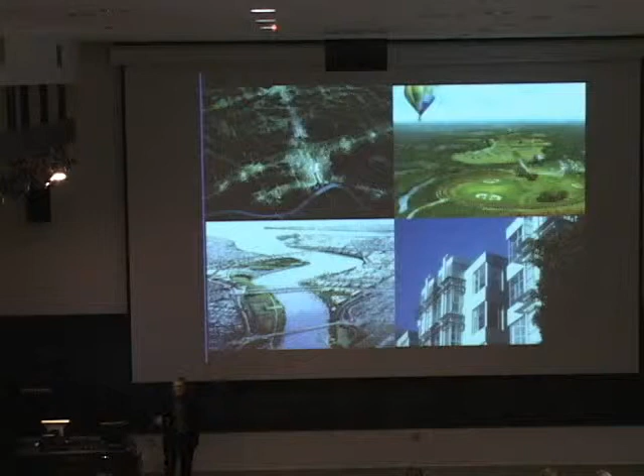Now, within this sphere, my work tends to focus on the urban environment and the ability for landscapes to leverage places -- this one in Nashville, Courthouse Square -- parks, this one Rick Espy here from MSI is very familiar with since we worked together for years on it in California, or streets -- anything that brings people together and creates dynamics by which cities specifically can become sustainable. That's been my focus for most of this incredible time in the office.

This is not my work. This is the cover of the Central Artery in Boston, the Rose Kennedy Greenway. We lost this project -- we came in second to AECOM, or EDAW at the time. We were teamed up with West 8. I only show you this because in my profession, and hopefully in yours, you lose probably more than you win. If you're batting anywhere between 300 and 400, you're doing really well.

So I will try, and we missed a lot of whiffs. I will focus on the few hits that we had that I think have been success stories.

The first one is in Georgetown in Washington. I'm going to share and focus on three projects today, describe them briefly, and then frame them in the context of these new ideas that I was mentioning.

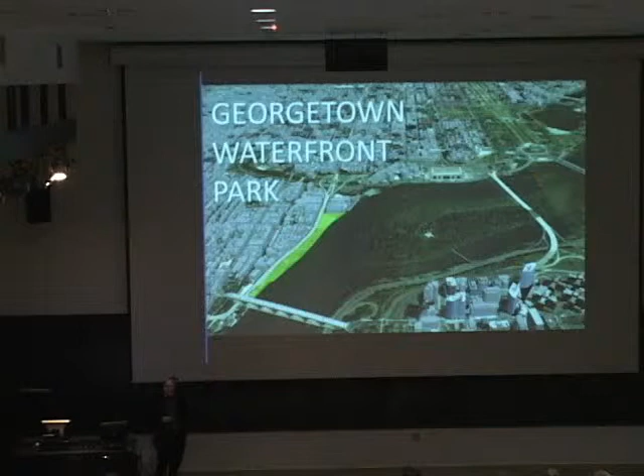This project is a narrow band that faces the Potomac River at the foot of Georgetown, which is a hill town. You can see the relationship to the Kennedy Center for the Arts and the mall and so forth. This is the case where, historically, Georgetown preceded the creation of the nation's capital.

Like Philadelphia, Trenton, and even Tuscaloosa in Alabama, these are towns created at the farthest navigable reach of the rivers that descend down from Appalachia. This is where it's called the Falls, the Little Falls, and this is where this place grew up.

It was a place where schooners and ships came forth to pick up tobacco and various other products to take back to the old world. In time, it became an industrial site with power plants, tanneries, cement plants, and things of that sort.

Eventually, they decided to put a highway between the waterfront and the town. That's what we inherited as a site, basically a parking lot.

This is a national park, same category run by the same folks that run Yellowstone. But this is the only waterfront urban park in the nation.

So it was quite a challenge to work on this, particularly working with a very diverse community within Georgetown, also the capital, the National Capital Planning Commission, and National Park Service. It was quite involved mechanics of designing this thing. I'll briefly share some of the key issues we had to confront.

This project was dedicated in two phases, the last one back in September of last year. It took from 2002 to 2011 to become a reality, and basically that's strictly a question of funding.

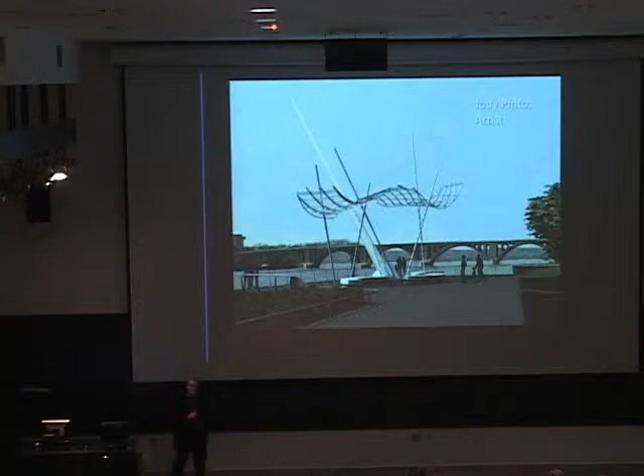It did not pan out. This was one that was rejected by the community, and instead we had to design, without her participation, a different kind of feature in this projection shot into the waterfront.

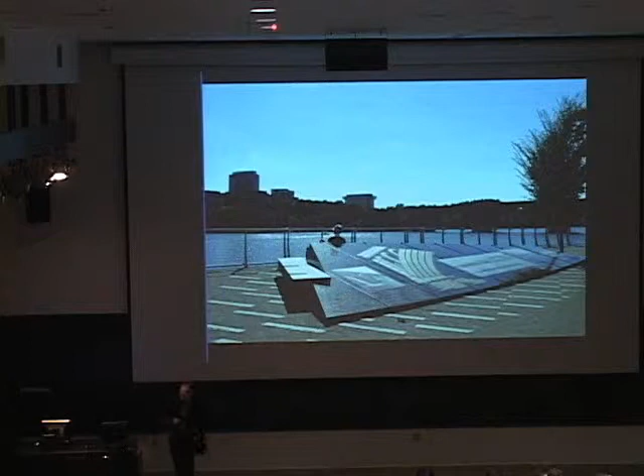These are basically granite panels that incorporate seating, etched with imagery of the place. The little wavy things that you see there are raised granite stone pieces that attempt to keep skateboarders away, which is one of the things that is always a concern in anything you design in a public environment.

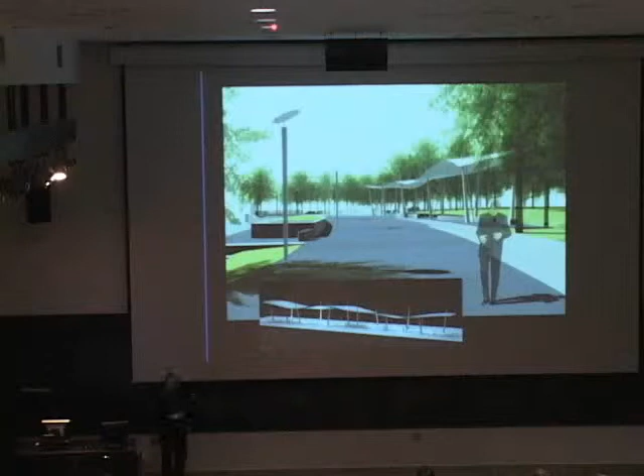So this was a case which is part of the theme I'm going to touch on today: the role of art and how you have to negotiate sometimes the things artists do or don't do in these kinds of things. Jody also designed this kind of wavy pergola that was supposed to be a fiberglass material that's transparent, including fiberglass benches.

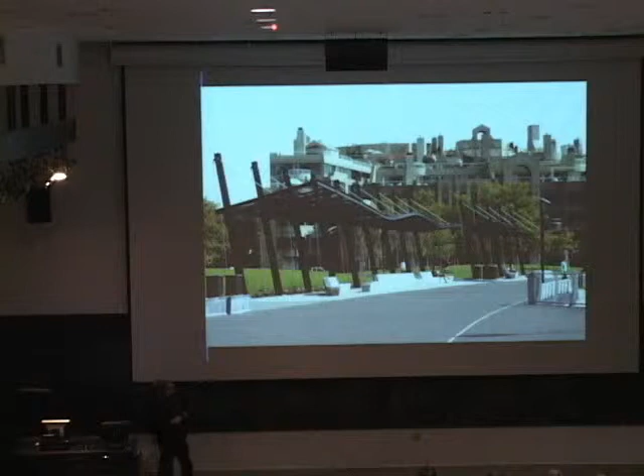And it also did not pan out, but we did keep the idea alive until the very end. So this is supposed to be a pergola. It was just installed, as I mentioned, last year, so the plants haven't yet been able to grow up on it. But it's there as a way to imagine a kind of waterfront that has to do with the expression and capture of a seaside environment, clouds and so forth, being in a different place. That's also structurally, from a material point of view, rather stark, not decorative, picking up the elemental qualities of being on the ocean and on a ship.

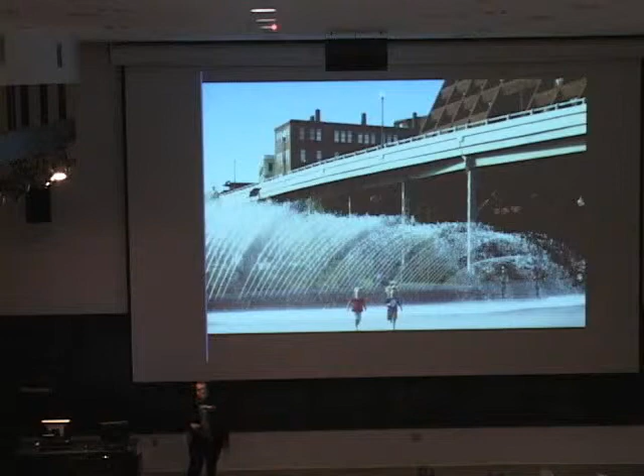And the fountain here was something that was quite interesting to design. It's a very simple fountain, really—there's nothing mechanically difficult about it. The jets don't move in any way, but it's supposed to come out of a big chunk of stone back there to create the form of a wave, as if a wave were coming up. And it's quite enjoyable for the kids.

So that's one project that I think was a real test of how you work with community, how you engage communities to fund something they can support, how you test against the community that wants something different than you as a designer—and clearly as an artist in this case—need to put forward. There's a whole dynamic about that I could bore you to tears with, but nonetheless it's so important in our profession to be able to negotiate those kinds of encounters and what the role of the designer and the role of the community is in those regards.

It's interesting—this image of Georgetown we saw after the design had been cooked, in fact already under construction, and I began to notice the projection of piers on the water, this kind of stone monuments rising up, clearly the ship. When it was all said and done, the design picked up on a lot of these features, unbeknownst to us in any way.

I think it's something about how you enter the process of design by getting so immersed into the soulfulness of a place and its historical qualities, to be able to absorb internally what might come out in terms of design. That's an exercise that's very difficult to do in practice because typically clients don't pay you to do that. You simply have to do it on your own time, go research, go to the historical societies, visit the site, be part of that environment for quite a while before you begin to absorb these qualities that you can pick up in design.

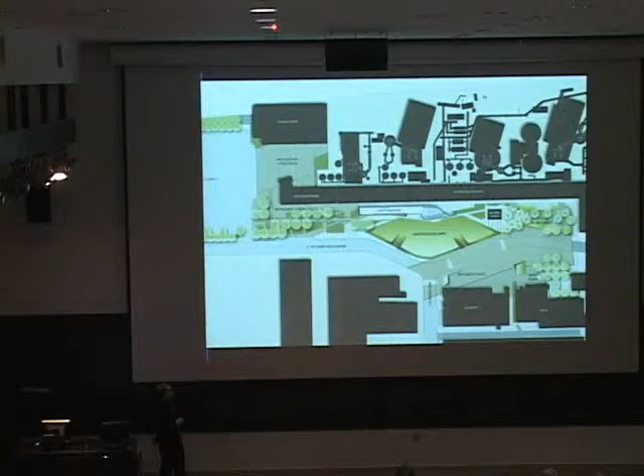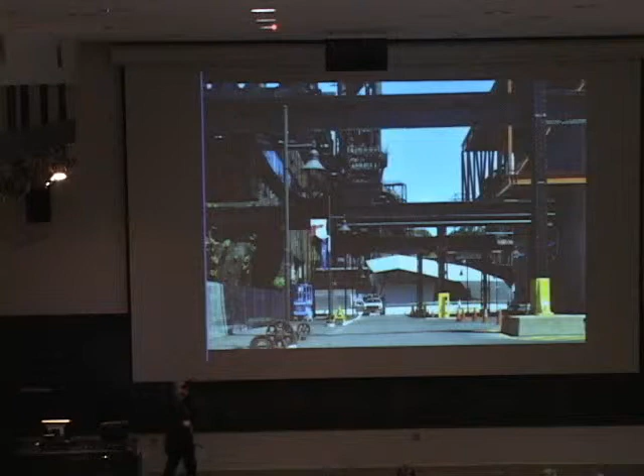Credit to them though, the casino was fairly sensitively designed to fit in with the environment. One of the things that had to be done was to curve the street that went through there so there would be enough room for the amphitheater to exist, and it had to be lined up with this street. Our office designed the building and the landscape. It was one of those landscape architecture collaborations, I think fairly successful.

It has a capacity for about 1,200 or so people. There are 60 free concerts a year. Behind this image to the right is the ArtsQuest building, and they have their own set of concerts. Off to the left, behind the building, they erect huge stages for 5,000 to 10,000 people performances several times a year. So it's quite a venue. Because it's about equidistant from New York City to Philadelphia, more or less, it draws an awful lot of people. It's a huge boon now to Bethlehem.

The stacks are lit up in the background. In fact, the design of the wall you see there, which is a sloping wall, is part of the lighting system. We didn't want any lights, fixtures or poles in the way of the view of the stacks. Working with L'Observatoire International, a lighting company in New York City, we came up with the idea of lights that would reflect off of the concrete surface. It's about a 3.5-foot rise to get the pitch down to the amphitheater. And there you see the lit pavilion.

Some of the ideas there: those wicket-like staples are in fact also light fixtures. They're basically simple fluorescent tubes that you can buy anywhere, Lowe's, Home Depot, attached to a frame that creates a special glow in the landscape.

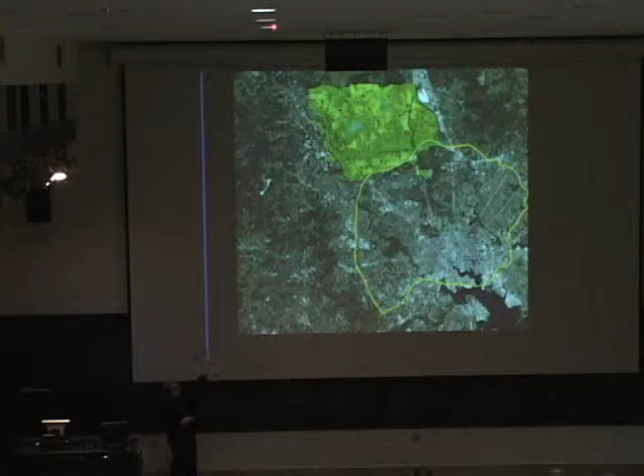It was a valley of agricultural land owned by well-to-do landowners who wanted to keep development at bay but make some money out of it. I won't bore you with the details, but it lies about 10 miles due northwest of Baltimore, even beyond the beltway. You can see the line there, and that's the size of the land compared to downtown Baltimore—it's many times bigger than that.

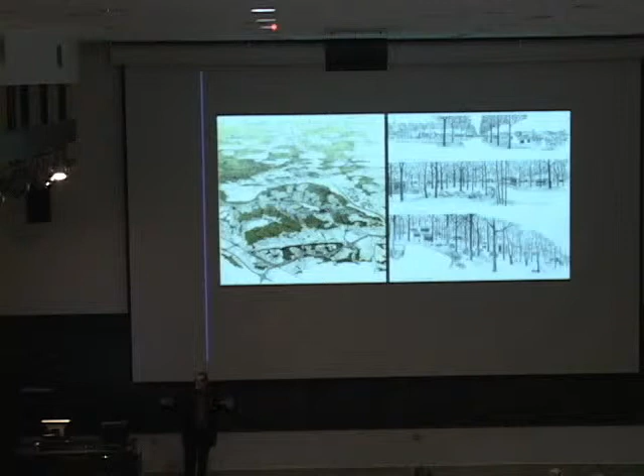These are some of the original drawings of creating clusters of development, trying to fit development in the woodlands, preserve the limestone valleys for agricultural purposes and so forth. Nothing ever happened—that never got built. There were other conditions that dictated why that didn't happen.

But here's another one: in the 1970s, the Woodlands New Community was one of those classic examples that's still written about, because all the drainage was done in natural ways. There were no pipes involved in stormwater, and as you know, it rains a lot in Houston.

Initially, there were modest buildings and houses like the one up top. Eventually, they began to get more and more valuable, and we began to see little McMansions crop up everywhere. Now there's a big town center in here that wasn't there originally.

This is what leads me, and I think many, to wonder: what is the legacy of design with nature? The Woodlands is 30 miles north of, and well outside, the Beltway in Houston.

And we know what this has meant in terms of sprawl. These are maps the U.S. Geological Survey made to map the growth of cities over the 22 years from 1970 to 1992. It has grown this much. It's interesting—I don't know if you can see the numbers in red, I guess they're not visible—but the Boston metro area has grown proportionally much more than Houston, which is shocking. It's more sprawled, even though the population hasn't grown as fast.

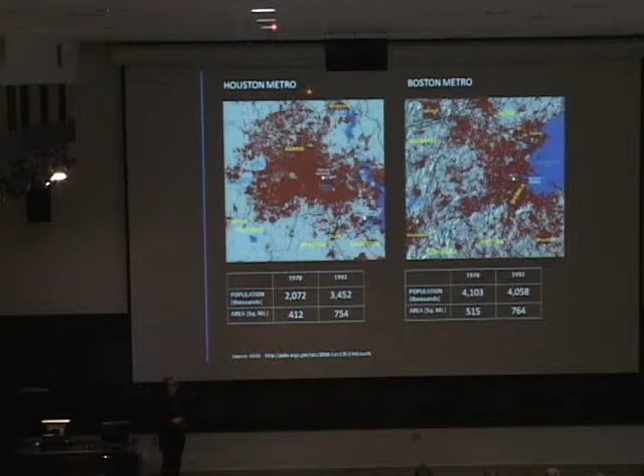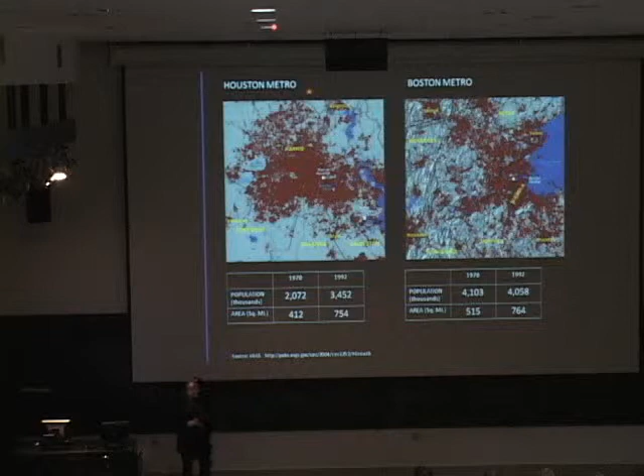But that's really the idea: if you do your planning correctly, following NEPA, you can do this—build your highways financed by the government to put people out there. It's not the purpose of this talk to tell you about the impact this has on climate and so on; it's been well documented elsewhere, I'm sure.

This is just one good book, if you want to learn about the health impacts of suburban development. It's quite a compelling talk that Richard Jackson provides in this regard.

But I think in the end the politics of sprawl are kind of irrelevant. We cannot expect that the next doubling of the population will occupy as much land as it did in the past 50 years. No way, no how.

And if nothing more, the limits of design—the land available for development—is shrinking because of conservation efforts. There's less land available to house the next 200, 300 million people in this country. That might take 70, 80 years, but still, it's fast coming.

And this is just one example: South Livermore Valley, off of the Bay Area. People were getting tired of that kind of development you see up there—the sort of one unit per 20 acres, or the golf course communities.

We did a plan about 15 years ago that began to concentrate the development in specific parcels closer to the town that was there, closer to the transit lines. The end result was something like this, creating a new agricultural environment—those are new olive groves, and there are vineyards embedded in the housing development as the landscape of the development.

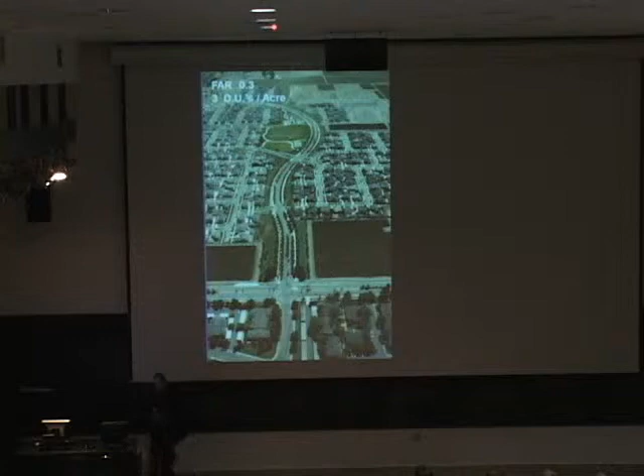Even this is not enough. This is what that development up in the upper area looks like—about 3 units to the acre instead of 1 unit per 20 acres. A big achievement there, but it's not enough.

We're going to have to start looking at models that are in the 30, 40, 50 dwellings per acre range, FARs of 3, perhaps 4. We don't have to go to the scale of New York City, but we have to go to that scale if we have any hope of achieving a sustainable matrix in cities throughout the nation.

So the question is, if you build it, will they come? What does it take to get people excited about these kinds of environments? I hate to tell you, it's not the architecture—it's not how well designed. This one was designed by Dan Solomon, who was a principal in our office for a number of years.

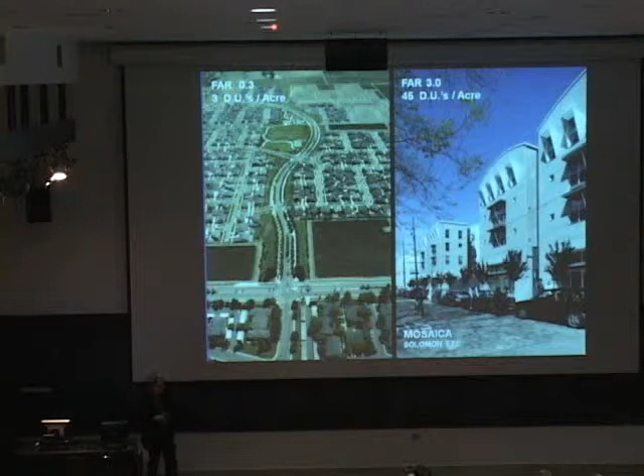It has to do with what I call this idea of beyond design with nature—putting in the green infrastructure, addressing what I call localism, which is working in specific places with specific people about specific issues that affect them, through a public engagement process.

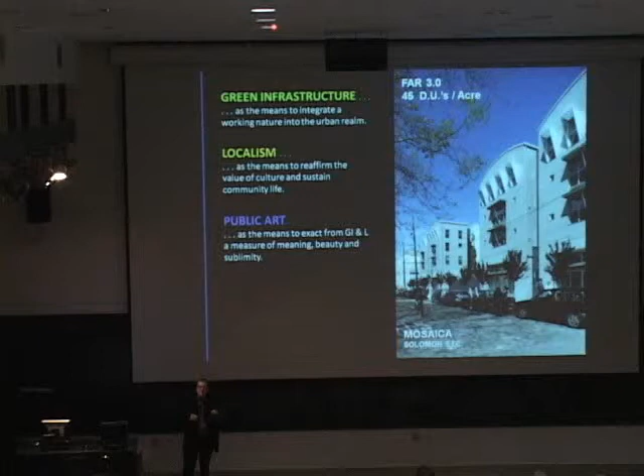And third, and very importantly, public art. I don't think there's been enough done in terms of integrating public art throughout. There are many programs that percent for art and so on, but it's very uneven, very difficult, and sporadic in achieving quality. So one of the things I'm trying to address is how do you integrate these three things within an ecological model? That's the basic question I'm trying to address.

We have changed the landscape. It's an urban landscape, and that is changing us. We are now much more focused on urban environments, and the urban nature, the things that we care about and do in this environment, is very different than it has been historically.

By the way, if you ever wonder where the longest, straightest road in the country is, it's in North Dakota, near Fargo, called Route 46, and it runs for 120 miles, straight and narrow. One day I hope to go visit it.

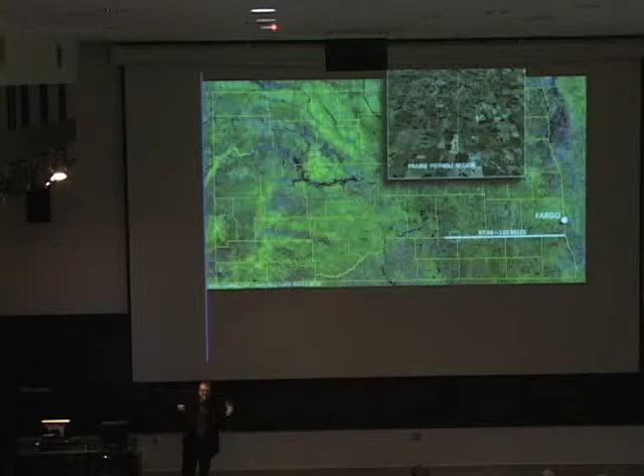Near there is a place called the Prairie Pothole region, an amazing collection—a regional thing that comes off of Canada. It's the biggest concentration of waterfowl, a migratory landscape, a remnant of glaciation that created these potholes that fill up with water, and millions and millions of waterfowl come through here. Well, roads slice right through them. So this idea of nature and infrastructure, I think, has to be looked at very carefully, especially by landscape architects.

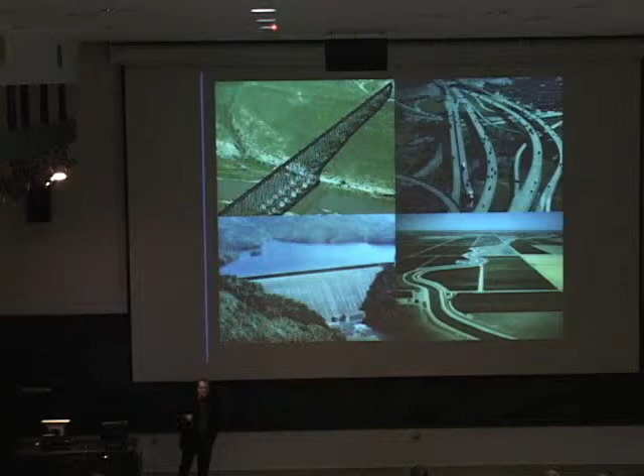This is the landscape that we have created—dams and highways and canals and railroads and all this kind of stuff. So the point of all this is that we have really reversed the formula of thinking that we have lived surrounded by a natural environment. Now we have natural urban environments that surround little remnants of nature, important as they may be.

And I think the one here in Philadelphia—this is called the John Heinz National Wildlife Refuge. It's about 1,000 acres, and you can see where it's at. It's surrounded by Philadelphia International Airport. The yellow lines are interstate highways. The orange line is a major northeastern rail line for Amtrak and freight. The blue lines that fade are the flight paths of airports. And then there's even a dashed line that takes you to the pipeline from a tanker port into a refinery.

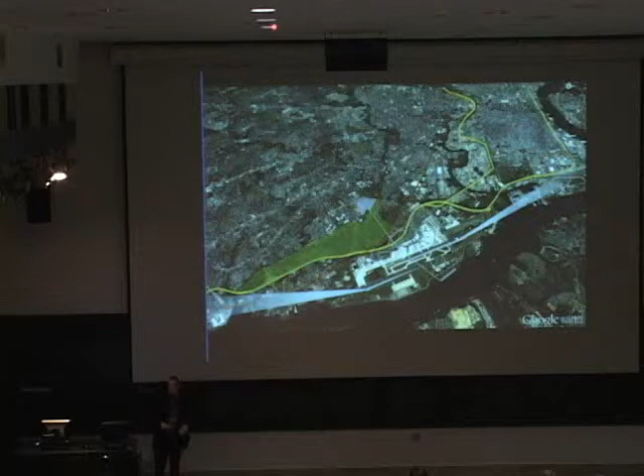And yet this is what's left of what used to be a major delta of one of the big creeks that empties into the Delaware River.

So I use that to get to this project, which is the Trinity River Corridor project—really quite a stunning desire on the part of Dallas to turn a piece of infrastructure into a living landscape. I think that if there's any future for the profession of landscape architecture, it is with infrastructure. And the more we can begin to address that, working with all the engineers who are working with infrastructure, the more we can gain on this question of greenness in cities.

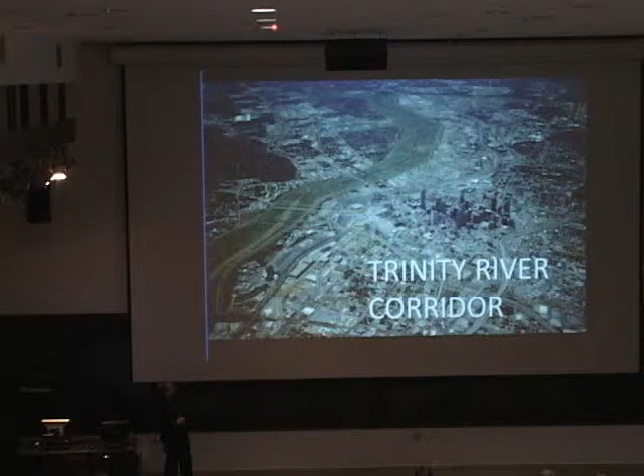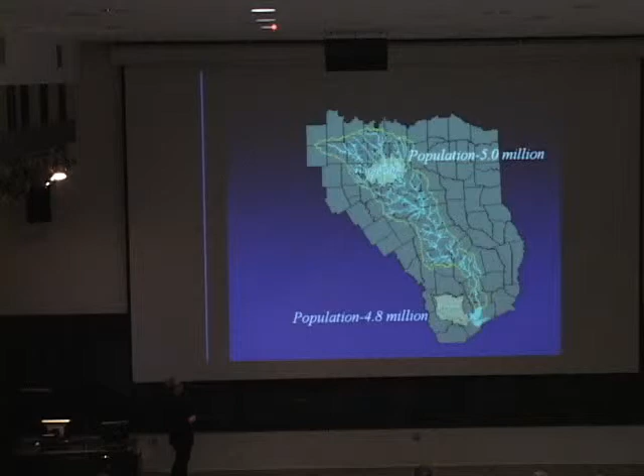It is part of a 10,000 acre parkland that includes some pristine bottomland forests on the bottom side. And this is the reason, in fact, why Dallas exists at all—when it was founded in 1840-something, they found a place where people could ford the river. They could actually walk across when it wasn't filled up with water because of the shallow geology of limestone that was there. So the idea of water and geology are embedded in why a city is where it is.

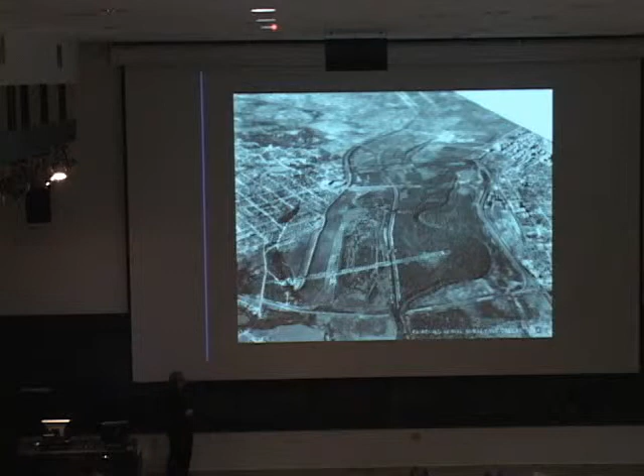There was a major flood in 1918 that wreaked havoc, and that created the idea that the Army Corps of Engineers should come in here and fix the problem, which they did. The first thing they did is they relocated the river—they moved it 3 miles. They also began to build levees. You can see the old river to the right, and the levees beginning to emerge. The future levee would be there where that line is. And of course, to build the levees, you have to build bridges to get from one side to the other—big, long bridges, more than half a mile in length.

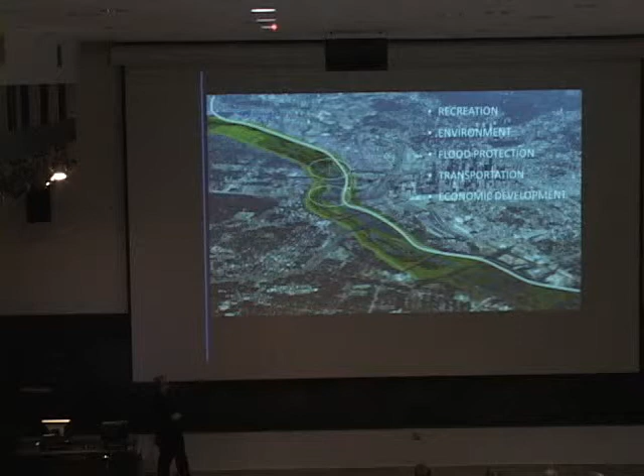And so the floodplain looks like this. We began to model ways in which it could be changed. One of our interests was to turn the highway into a major work of green infrastructure. So that's just one of the things we did.

There were lots of questions about birds. We talked to the Audubon Society, and they said don't worry about it—birds are more worried about cats than they are about these things. But it nonetheless was a source of concern, because if a bird were to hit a blade, it might fall on somebody's windshield traveling at 60 miles an hour. All just diversion tactics not to put this stuff in there. It is in the books, it is in the guidelines, and I think there are lots of people interested in doing this.

It looks like a park, it smells like a park, with lots of recreation, more than 40 miles of trails. But the big idea was the lakes. There's 3 of them. This one really is an Olympic rowing course.

We're using these devices called SolarBees. They're solar-powered devices that churn water so you can keep it circulating without electricity, and they float. There's about 4 of them throughout the lake.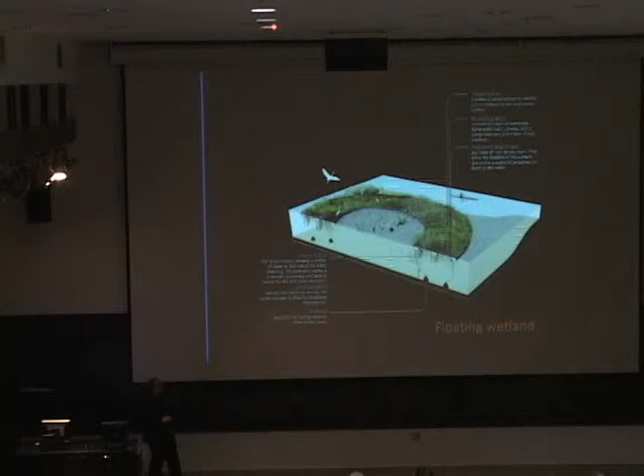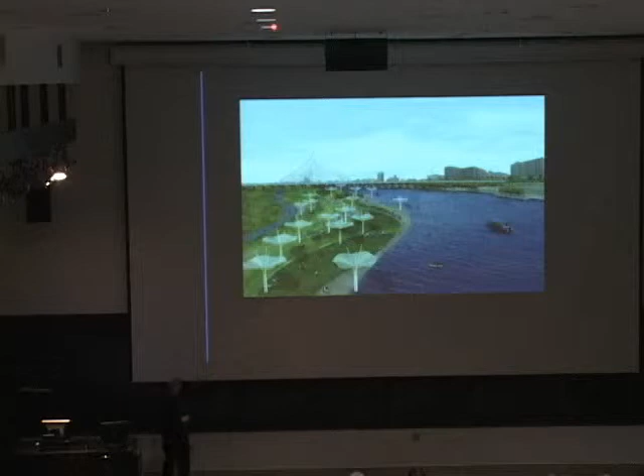Then the urban lake, of course, is what it is, much more about recreation activity, people gathering, fireworks, 4th of July festivities and the like. But the whole thing has to flood. So we placed the umbrellas such that when the floods came, they could almost appear like water lilies, and they were lit up. It's all solar fabric, so they'd have basically no electrical conduit coming to them—just self-powered.

And by the way, that's one of the Calatrava bridges on top, which will be dedicated to the public in a month.

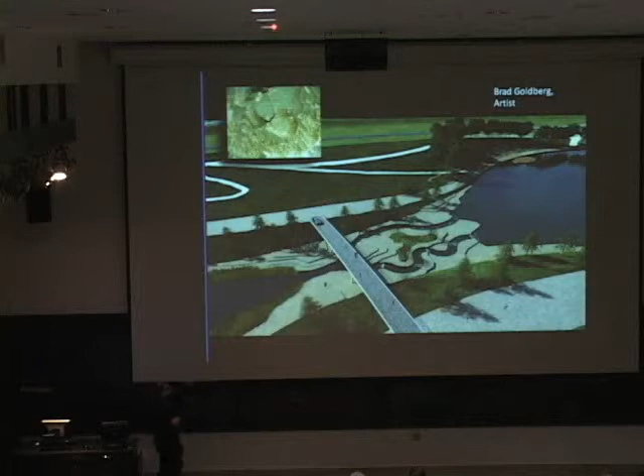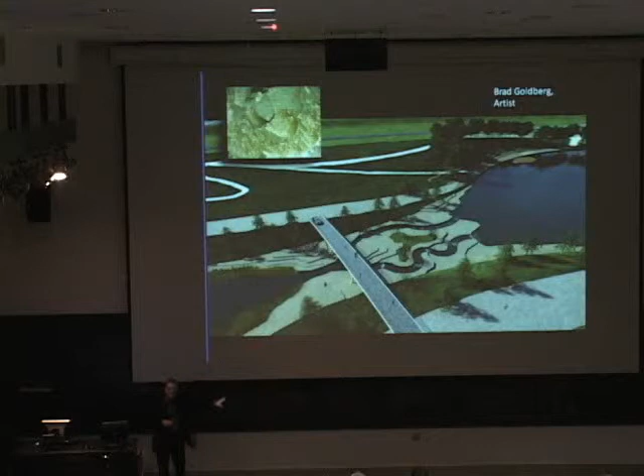The isthmus is a place of interest. We work with artist Brad Goldberg, a specialist in working with limestone, based in Dallas—he works all over the world, but he lives there. The idea was to create a place that could be forded, walked over from side to side using local limestone, but also allowing passages for kayakers and things of that sort. So it becomes the center for the idea that you can habitate this river in new ways, recalling the very nature of the place when the city was founded more than 150 years ago.

What's of interest here is not the recreation stuff I just showed you, but in fact 82% of the site is some kind of natural environment—whether wetland, woodland, meadow, lakes, or riparian.

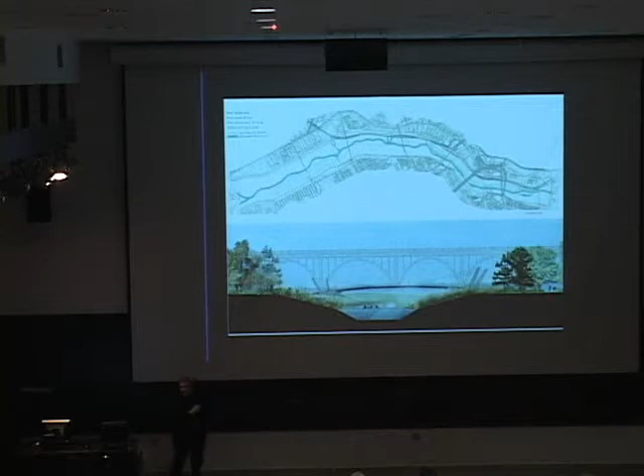The river, for example, is taken out of a straight line and given a new meandering quality. It's being lengthened by about 3/4 of a mile because of the meanders, working with engineers to create an embankment situation that allows for new habitat, so it works as a wildlife corridor connecting that big forest I showed you before with this thing here. This is the only instance I know of any city moving a river twice—but it hasn't been done yet, so you don't know.

This is one of the flood images. When you put water in a floodway, hydrologically the coefficient of resistance for new water moving over it decreases dramatically, so you speed up floodwaters as they move over it. The Army Corps of Engineers won't let you do that because it creates impact downstream. So you have to find a way to resist the water, to create a hardened coefficient, and the only way to do that is through trees.

So in a floodplain with almost no trees, more than 19,000 are being planted here—that's the impact of 19,000 trees. It's not that much if you think about it in terms of carbon sequestration, but it's a big chunk, it helps. I think one of the things you can always consider in landscape architecture is the impact on these kinds of serious issues we have to live with.

There's more than 300 acres of wetlands being created with new vegetation, and that's the impact of that. Wetlands are actually far more efficient at trapping carbon than trees. Of course, they produce methane, which is a problem, but scientists are still trying to figure out the cost-benefit of that.

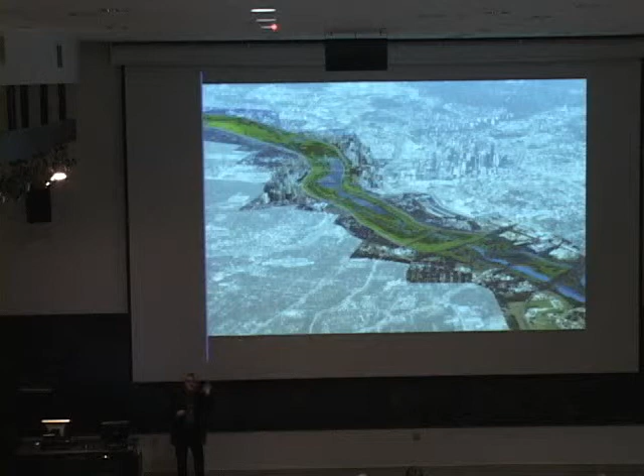So if you really want to have an impact on sustainability, it's not about more efficient cars, it's about concentrating people around an amenity that they would want to live by and enjoy, creating a different kind of city than exists there. It's easier to do in the Southwest and Midwest, where you have land in the city to do it.

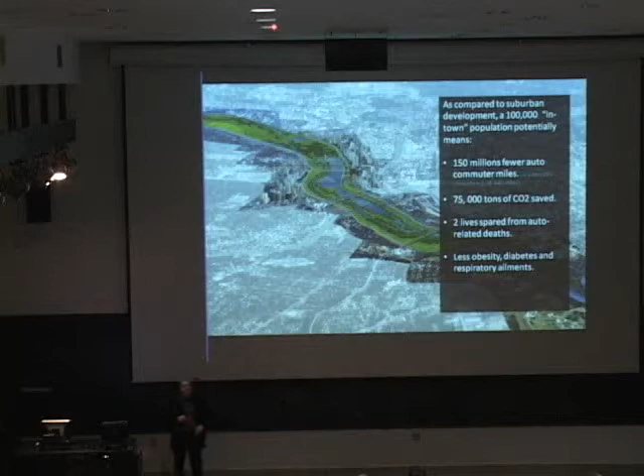Statistically, you would be saving two lives a year. Maybe that doesn't mean much, but if it were yours, it would mean a lot.

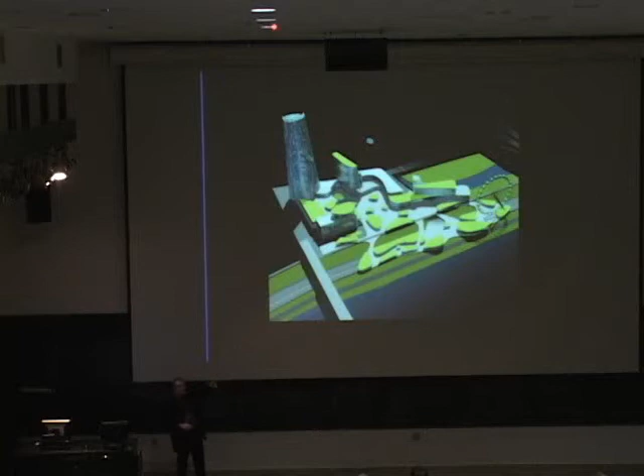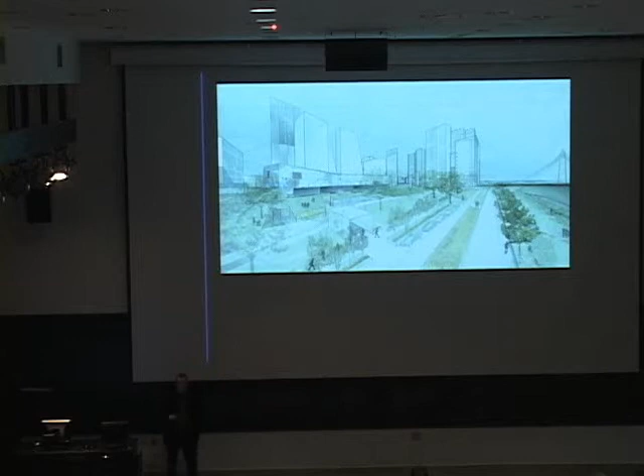And what this did was begin to attract development. This is one developer out of San Diego who came to our office looking for a way to span the levees and the highway to create a waterfront environment in Dallas where there is none today. We happily obliged—that's part of the design of the park. We're interfacing with this development, and other developers across the way are beginning to look at the same kinds of things.

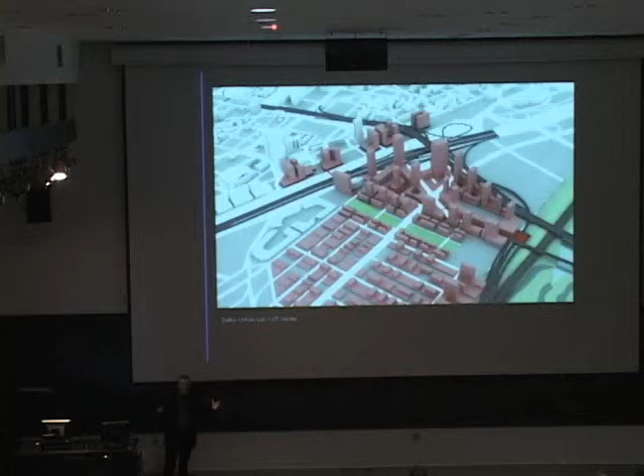UT Texas has a studio in Dallas every year—I don't know, Jason, if you were there when they did this. They did some urban design plans there. You can begin to see the impact of green infrastructure in the city.

What we really tried to do from the beginning was tell the city and everyone that it's not about the park itself, but about projecting this infrastructure out into the urban environment—what we call Parks Without Borders. It's about corridors of connectivity, even to development parcels per se.

That's the new Calatrava Bridge that will be dedicated in a few weeks. The bridge next to it is called the Continental Bridge, and it will be abandoned because it's no longer serviceable or needed as a transportation corridor.

So we've been doing designs to turn it into a pedestrian way, almost like a High Line, but a la Dallas. It's about 50 feet wide and about 2,000 feet long, and it's already going into construction, probably sometime this summer. It's one of the issues of green connectivity.

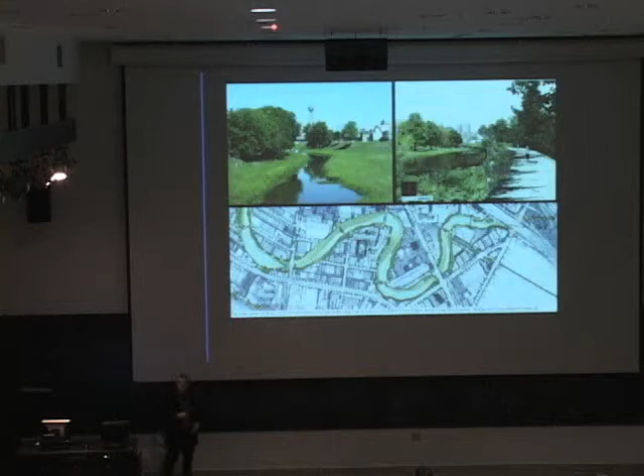The old sumps, the old river—people are taking designs to create trails and bring new housing attached to that. We have done designs for all the major streets surrounding and framing the floodway using complete and green street models. For me, this is where it gets so interesting.

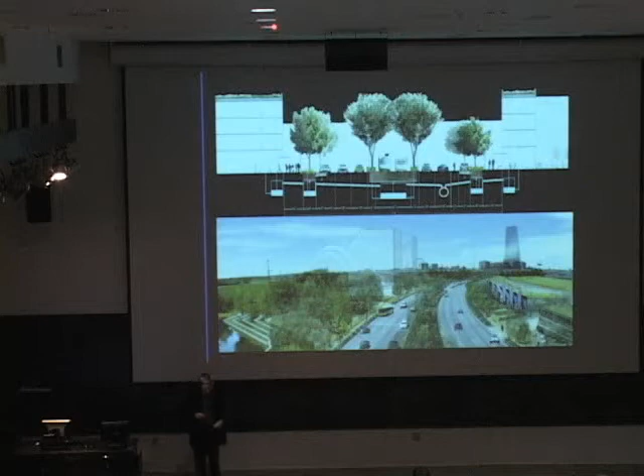It's about going from the regional use of landscape for infrastructure, such as water in this case, to the rooftops of those buildings. What connects the two, I think, is the important thing. You have to use systems thinking that engages architecture, planning, and landscape architecture in all these concerns to make a wholeness out of the thing.

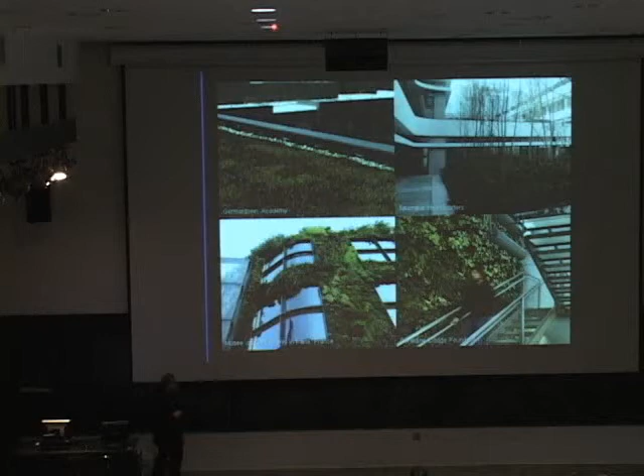This is all work we do, except for the green wall—I'd love to do one, I haven't done one yet. But it's about the green roofs, the terraces, the indoor ventilating green walls. It's taking that to the street level, to the bikeways, to the big parks, in one consistent application that applies systems thinking on energy, water, air quality, noise, cultural heritage, and so on and so forth.

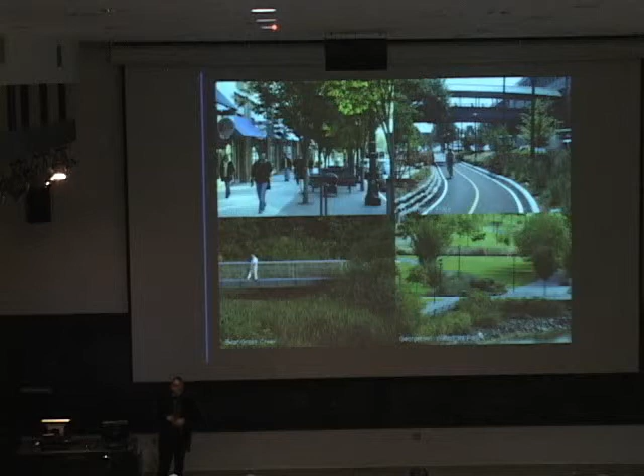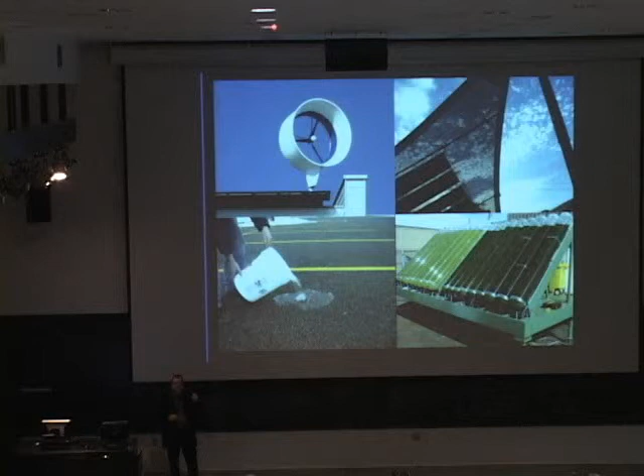And then we get to this—I mean, this is good stuff. There's no reason not to have algae farms on rooftops. Actually, we'd be far better off putting algae farms on rooftops than solar panels, in terms of energy production and impact. All this stuff exists—this isn't being tested out in labs, this is all proven technology. I keep thinking, what would happen if this country spent what it spends on highways doing this kind of stuff instead? Where would we be in 50 years?

Even stuff like biotrophic treatment plants - this was invented by John Todd. It's basically a toilet that brings your wastewater and treats it in a tank on your rooftop. There's no reason not to do that.

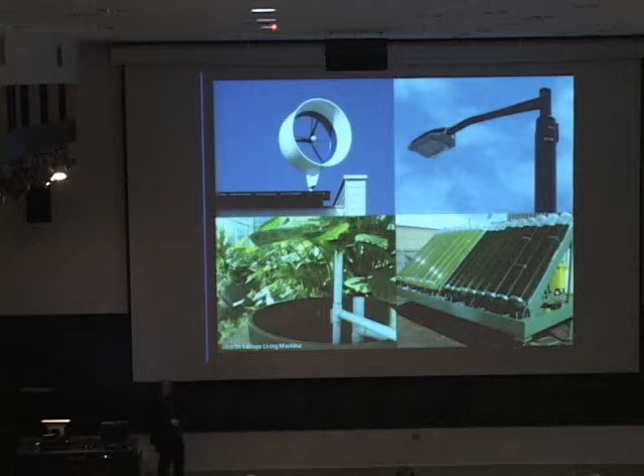But we cannot forget, and this is the main point for me, that ecology is not strictly about green stuff. If you follow the writings of Leibniz, if you follow the critique of Gilles Deleuze in The Fold and the Baroque, you realize that ecology is also about what's in the mind - it's mind and body unity, which is perhaps an anti-enlightenment idea. Let's get rid of the enlightenment for a minute and think about ways we can connect these two things - what's in the heart, what's in the mind, as ideas to bring forward.

I come back to this image of the potholes in North Dakota. This is a landscape that has been severely tested and impacted by agriculture, and yet it exists in the minds of people in Fargo as an ideal place so close to the soul, so close to the heart, that it deserves a place in design.

This project, called Fargo 365, is a winning competition entry that four of our staff in Philadelphia did for an urban block in Fargo. The name comes from the idea that you can occupy a public space and a building 365 days a year in a climate that really isn't easily conducive to that.

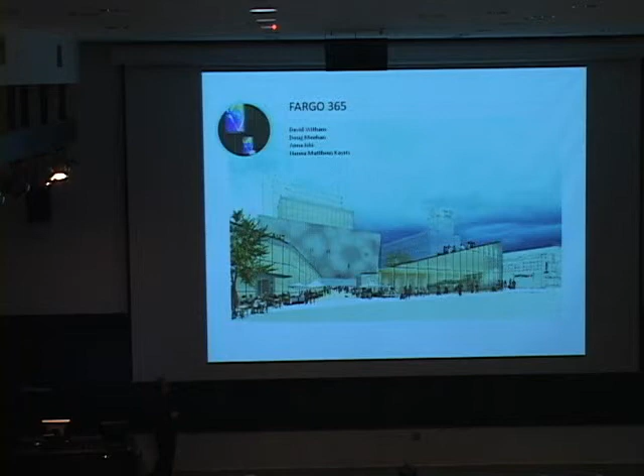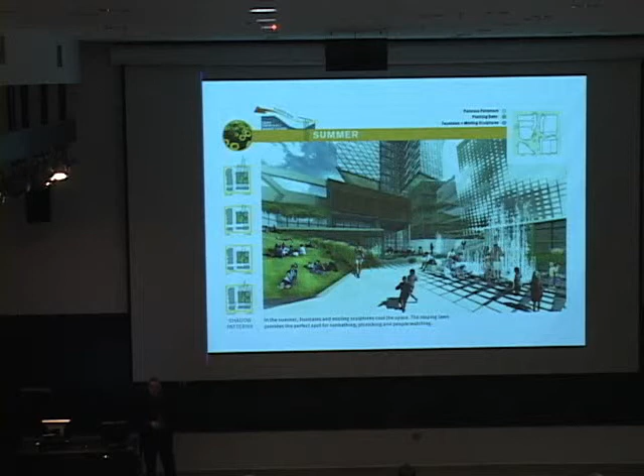You can begin to see things like little potholes here and there. They're using them for water retention, for BMPs, to absorb and filtrate water, and also to create amenity within the plaza.

Artwork is incorporated as part of a digital display, interactive with people. So the idea of localism, art, and infrastructure begins to fold all into one.

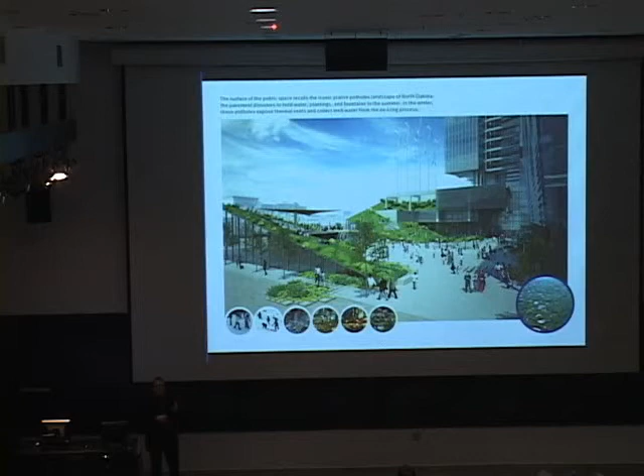There you see the summer scene. It's difficult in this project to really identify where architecture begins or where landscape begins and architecture ends, and vice versa. It's so embedded one with the other, functionally as good infrastructure, but also from the art perspective and the spiritual perspective of recognizing something about a landscape that's dear to these folks.

And then in wintertime, they use geothermal pumping to be able to defrost the plazas and create a microclimate you can use year-round.

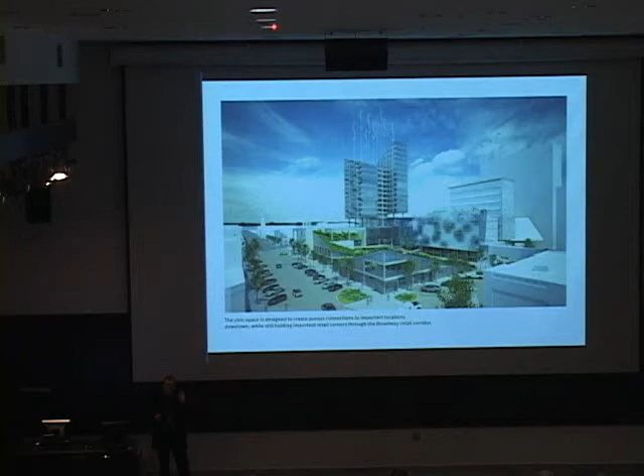I have to think that more of the future of American cities rests on projects like this, where you begin to fuse the lines between what is architecture and what is landscape architecture, through the lens of green infrastructure and ecology as a house with two floors, if you will - the spiritual and the body.

We have to go back, I think, to the Baroque to understand this sense of unity that I'm describing here. And if you read Deleuze's work, he has some important things to say - such as the idea that sculpture, architecture, and city planning are all part of a continuum. They're not divided cleanly.

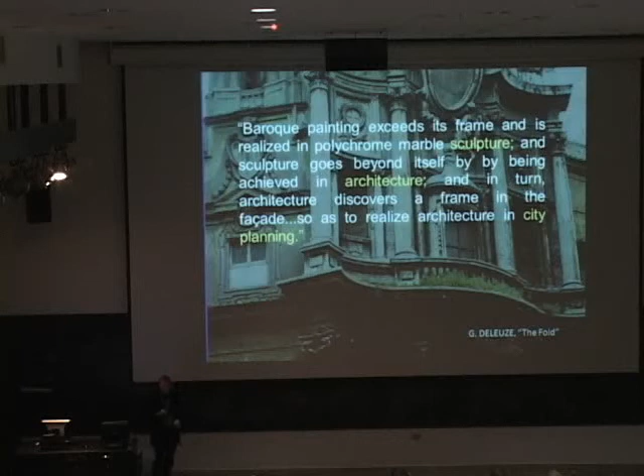The buildings, inside and outside, begin to project and express this continuity, and furthermore what he calls continuity of the arts. For me, the key phrase is that 'matter that moves through it' - this is both a physical and a spiritual matter in the Baroque that moves through the work, which was the intent of the Counter-Reformation through this sort of grandiose architecture and art.

But in this case, we can translate that to: what if the matter is green infrastructure coupled with this localness that can be looked at in every condition? And what does it mean to unify the arts, city planning, architecture, landscape architecture, interior design, engineering, into something cohesive that begins to advance visions for the cities of the future?

When I took this picture, I didn't realize there was grass growing on the railing. I think it was quite present, and I regret that it has been taken down.

Anyway, I leave you with this - I think that's the quote from the book I enjoy the most. I think it has to do with this idea that we cannot forget about the poetics of design, the source of form, as you begin to address questions of sustainability, which were not addressed, I think, in Design with Nature, in terms of conceptually looking at habitat as something of the mind. Thank you.